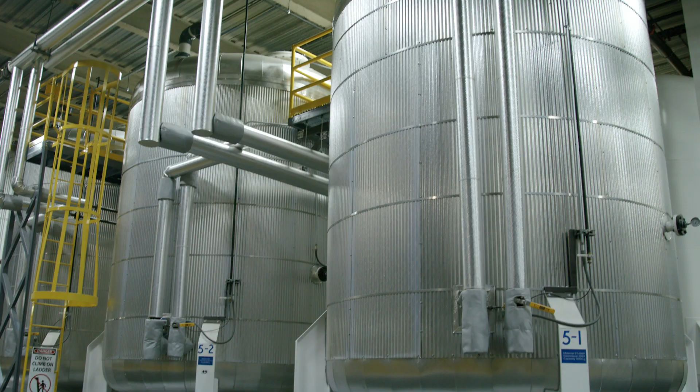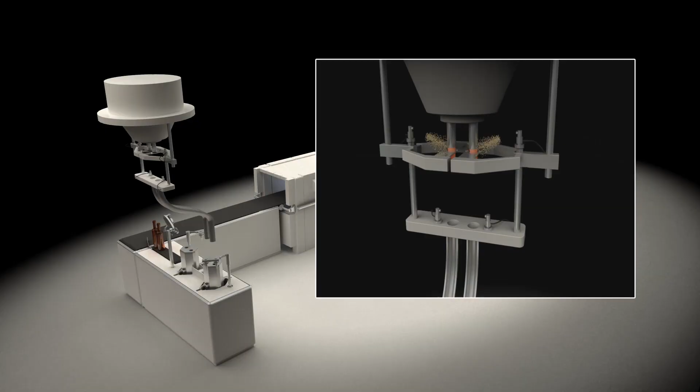Total Lubricants USA Incorporated is the supplier of clean mold hot-end lubricants and coatings to the worldwide glass container industry. We are dedicated to providing you with high-quality products, service and value. Total Lubricants offers a full range of products for all applications, including hot and cold end lubricants and coatings. Everything the glass industry needs, from the shears to the lehrs.

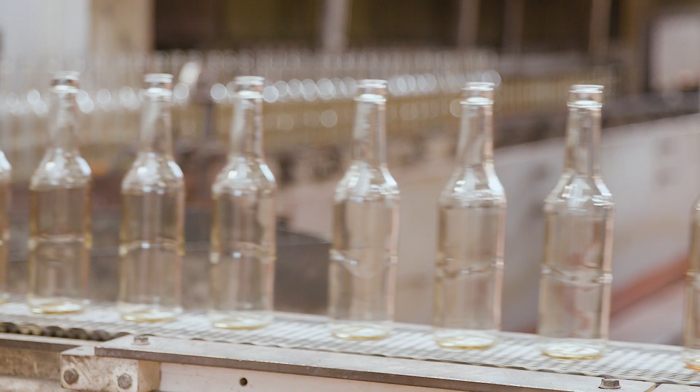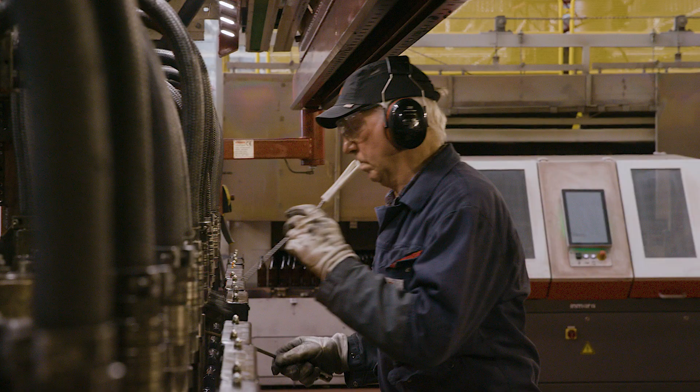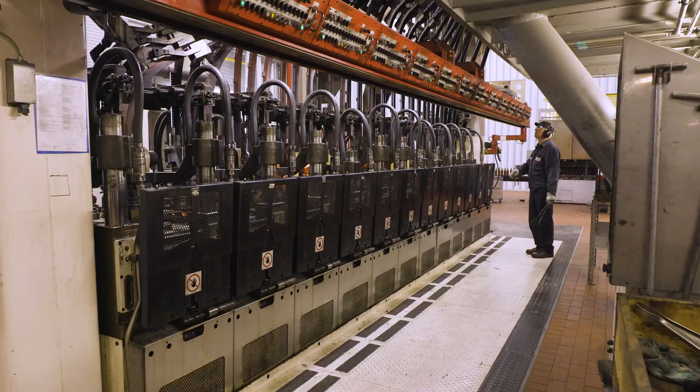In this presentation, we'll demonstrate the method we recommend to apply our clean mold swabbing compounds. These recommendations are based on our years of experience and feedback from you, our users. We'd like to remind you of certain basic fundamental rules about swabbing and safety, which we know will benefit you and your operation by significantly improving productivity and making your job easier.

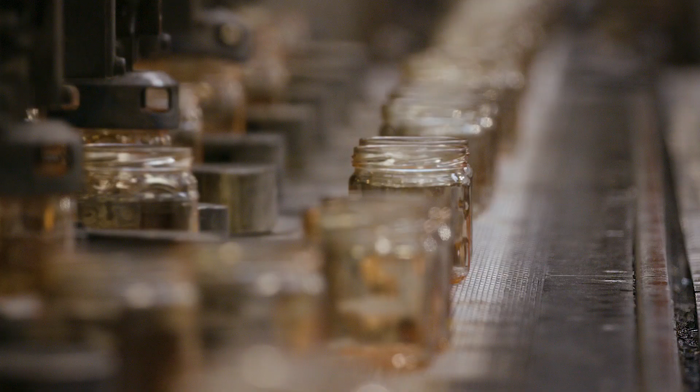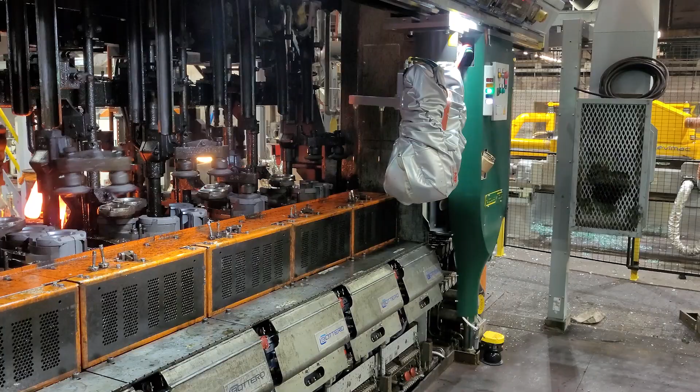Our goal is to help you get the maximum benefit, the best performance and the best value when using our products. Clean mold swabbing compounds are famous worldwide for their performance, quality and value. Glass factories benefit from these attributes by achieving the highest percent pack and production efficiency. In addition to clean mold, Total Lubricants offers a full line of coatings and lubricants for all hot-end lubrication applications, from the shears to the lehrs.

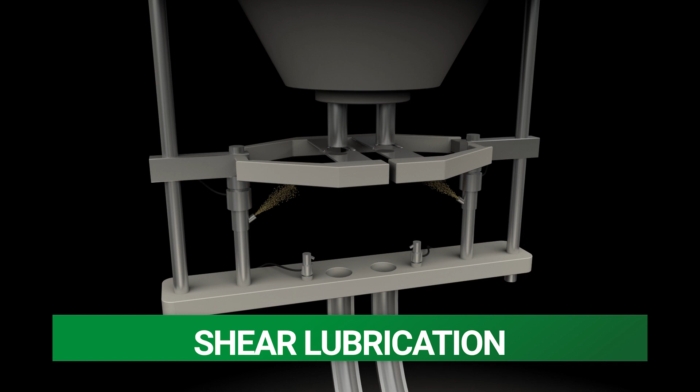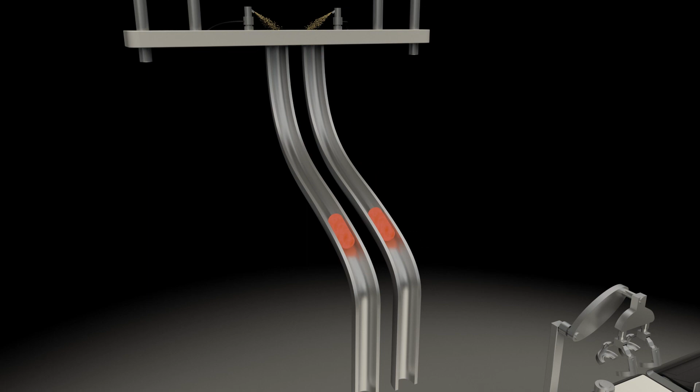Our shear lubricants work at high dilution ratios, so glass factories benefit from a very low cost per litre of emulsion. These lubricants offer excellent protection against corrosion, prolong the life of the shear blade, whilst minimising shear marks, but still offering excellent cooling and lubrication of the shear blades. Our GlassFlow product range is able to lubricate a delivery system without forming any build-up or deposits on the scoops and without leaving any marks or residue on the gob.

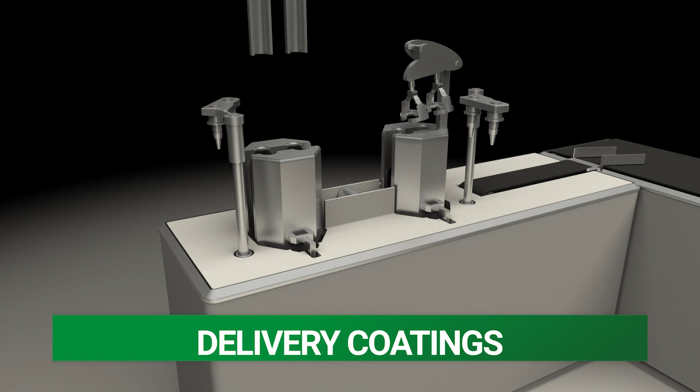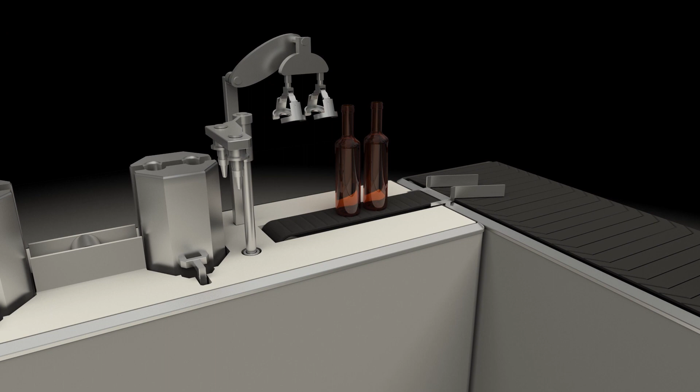In order to deliver gobs to the blank on time and on spec, we offer epoxy-based delivery coatings which are applied to the delivery equipment before being put into service. Delivery coatings are compatible with both oil and water-based products, which are used to help facilitate loading. Our products reduce the coefficient of friction between the gob and the delivery equipment, which allows delivery of the gob to the blank in a reliable, timely fashion each and every time.

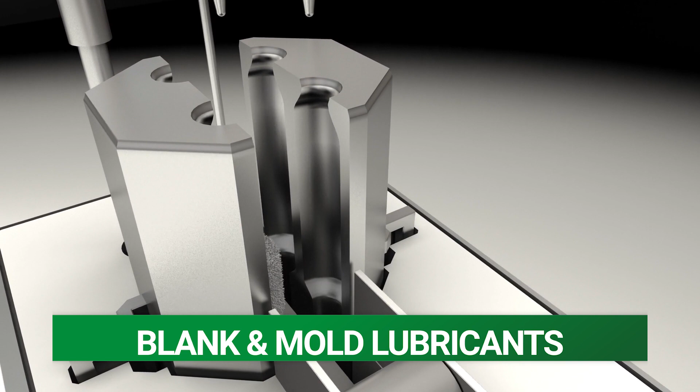Clean mold swabbing compounds are used to lubricate the blank. Clean mold products provide excellent lubrication, release and longevity of mold equipment. We have various products for different types of processes and production environments, with Clean Mold 170 and 197 still being our most popular products. Total produces special compounds to lubricate rings, molds and bottom plates. Some products are for specific applications like narrow neck press and blow, bronze molds, pharmaceutical bottles and so on.

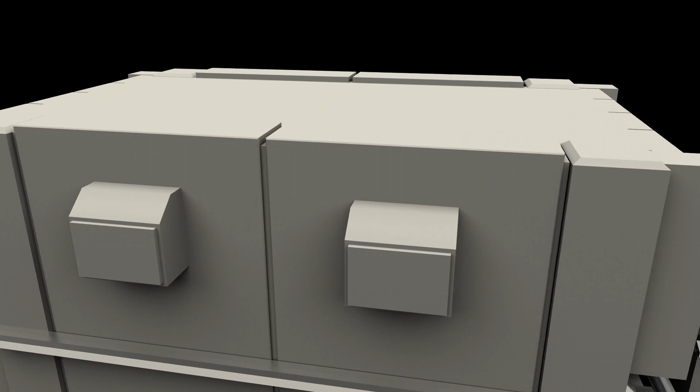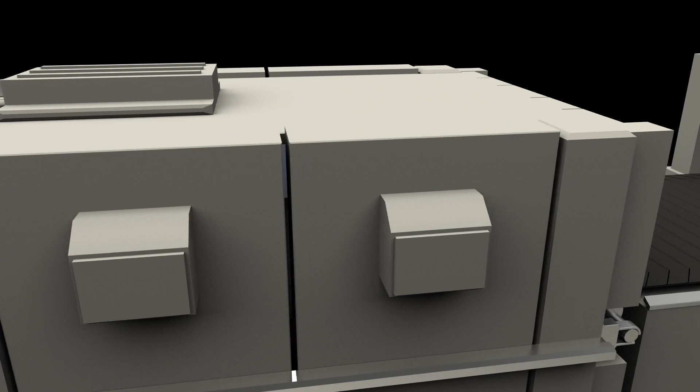Total also produces a graphite-based lubricant for use on the conveyor systems, allowing newly formed bottles to move smoothly from the machine to the leer. Compounded with an aqueous base and containing micronized graphite, it's supplied in an easy, ready-to-use form. Our cold end coatings provide excellent lubricity, scratch resistance and label adhesion.

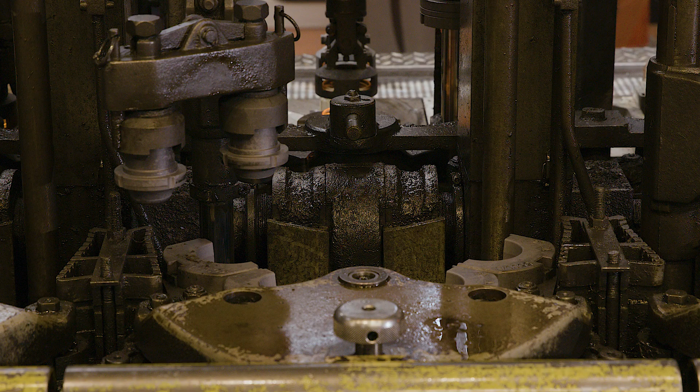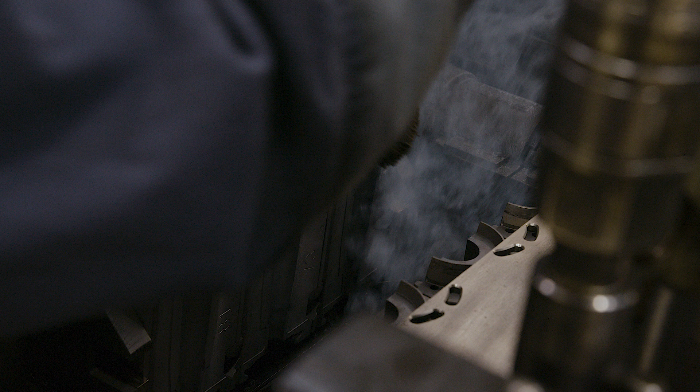So why do we have to swab? We swab to aid the forming process and to keep the machine running. If the machine's setup was perfect and could be perfectly maintained, we probably wouldn't have to swab at all. But since it isn't, we swab to keep the machine running. What does swabbing do? Swabbing provides lubrication so that the glass can move around without distortion inside the blanks, rings and molds. Swabbing also provides release so the glass doesn't stick to the metal mold equipment.

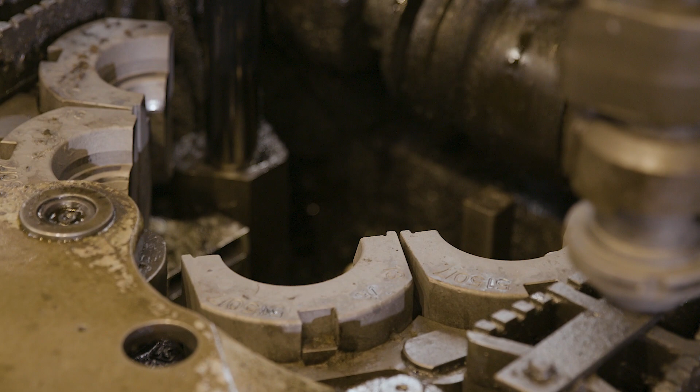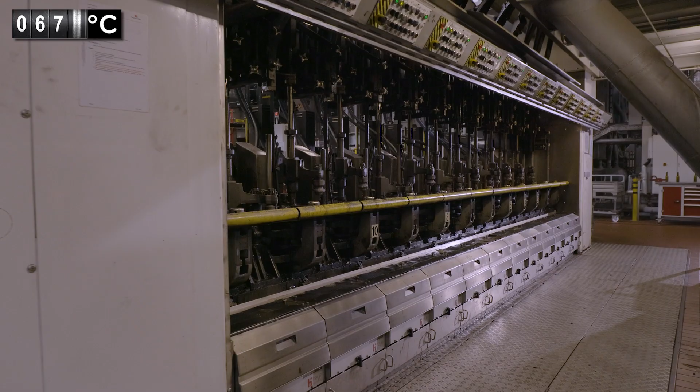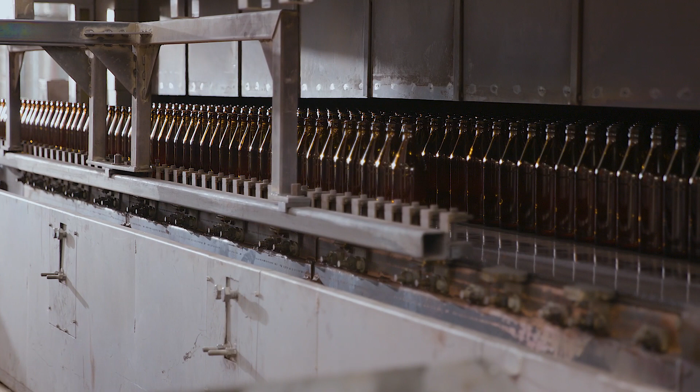Swabbing regulates the transfer of heat by providing a thermal barrier between the glass and the metal. A 1150 degrees Celsius gob of glass is transformed into a 425 degrees Celsius bottle. And finally, swabbing helps to eliminate defects. While proper swabbing will eliminate defects, on the other hand, improper swabbing can sometimes cause them. That is why swabbing correctly is so important.

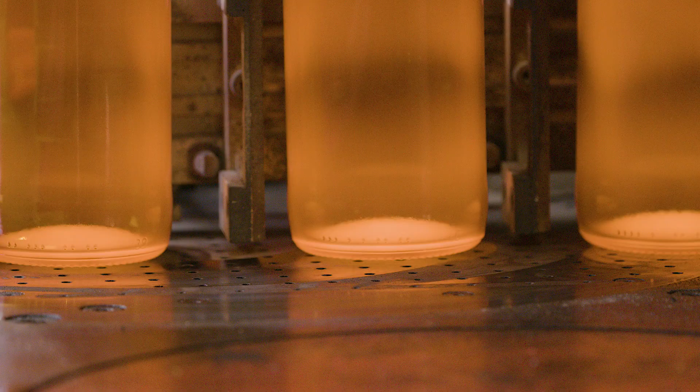Swabbing is the biggest variable in the bottle forming process because the product is applied by hand. Therefore, swabbing can have a significant positive or negative impact on productivity. The goal of this swabbing program is to demonstrate what we believe to be the best recommended swabbing application procedure. We believe our swabbing application procedures will assist you to maximize productivity and percent pack.

It will provide for the most efficient use of clean mold, and it will assist you in achieving the best possible overall results. We cannot stress enough how important it is to swab the same from shift to shift, because we believe that if you swab the same, you pack the same.

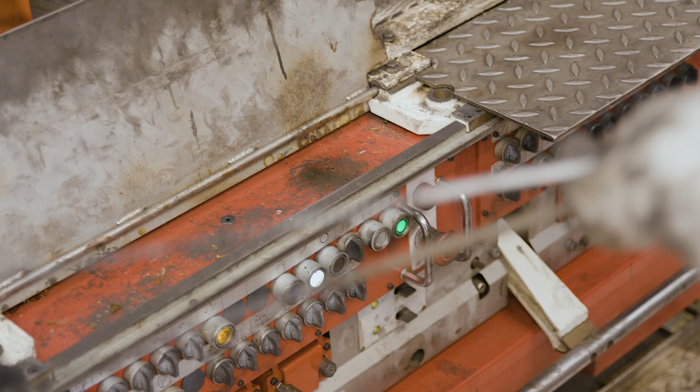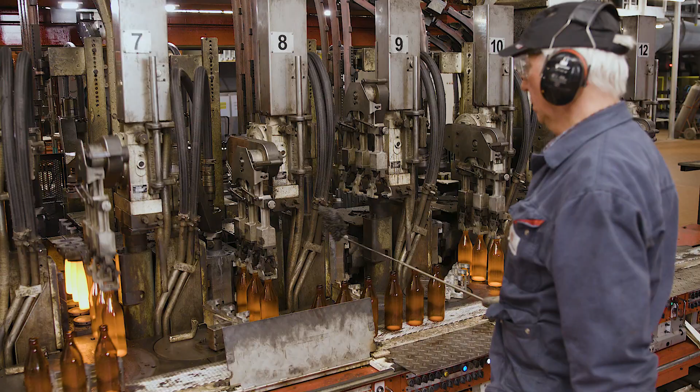We know a lot of people might be thinking, but I already know how to swab and there's nothing else I can learn about it. It's true that you all know how to swab and you can make bottles, but not everybody swabs correctly, and not everybody swabs the same way. We believe that by swabbing the right way and the same way from shift to shift, you will significantly improve productivity and make your job easier.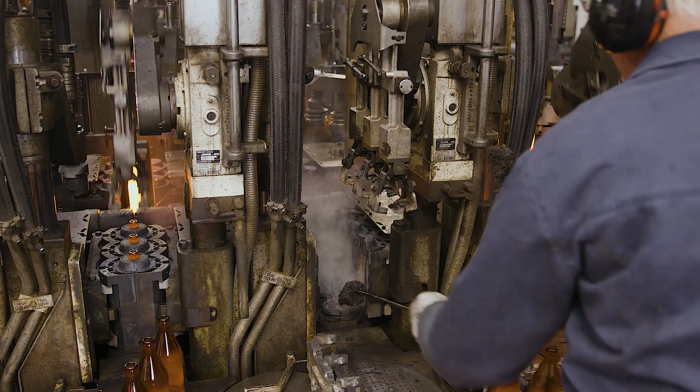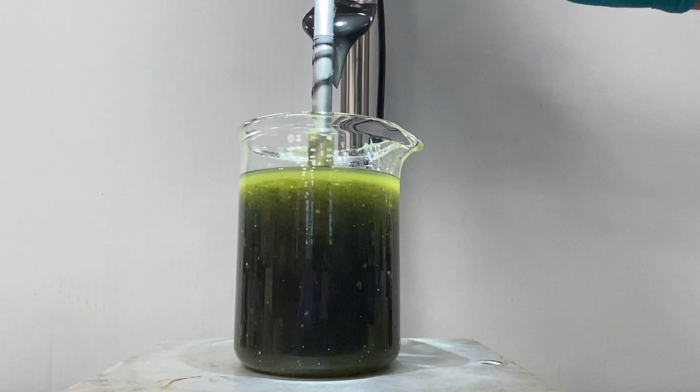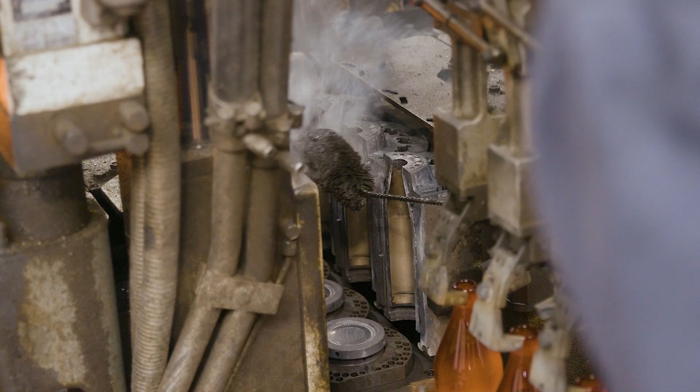What are swabbing compounds and how do they work? Swabbing compounds are made from graphite, petroleum oil, sulfur, binders, surfactants, and suspending agents. The graphite does most of the work. The graphite is the solid film lubricant that gets deposited onto the surface of the mold equipment to provide lubrication and release. The petroleum oil is just a carrier that allows you to deposit the graphite. The petroleum oil burns off and has nothing to do with lubricating.

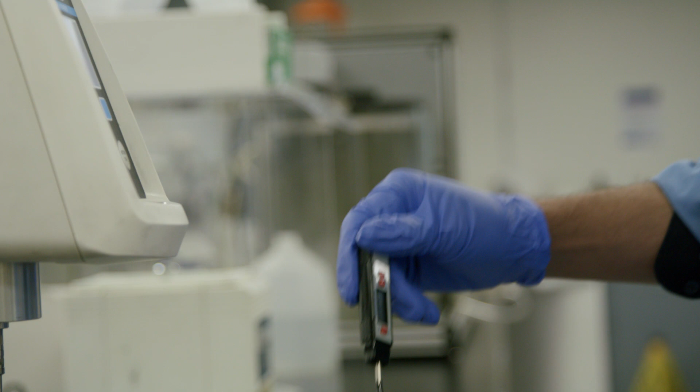The sulfur is added to help reduce checks. The binders stick the graphite to the mold. The surfactants provide wetting at high temperature because in order to have good adhesion, you need good wetting. And the suspending agents prevent the graphite from settling in the drum.

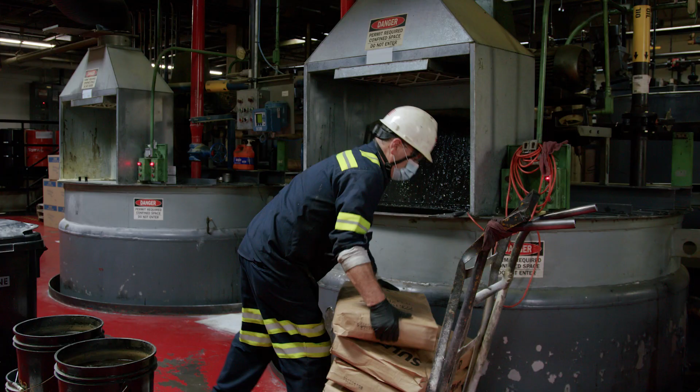In order to have consistent swabbing, you need to have a consistent product. We want you to keep the neat product cool, out of the sun, and store below 120 degrees Fahrenheit or 50 degrees Celsius for extended periods of time. Don't mix different products together, don't heat the product, and don't dilute the product. In order for you to have consistent swabbing, you need a consistent product. When putting the graphite on the mold equipment, you control where it goes and where it doesn't go.

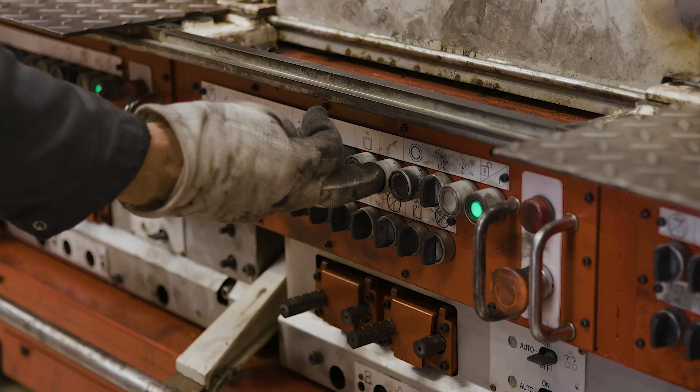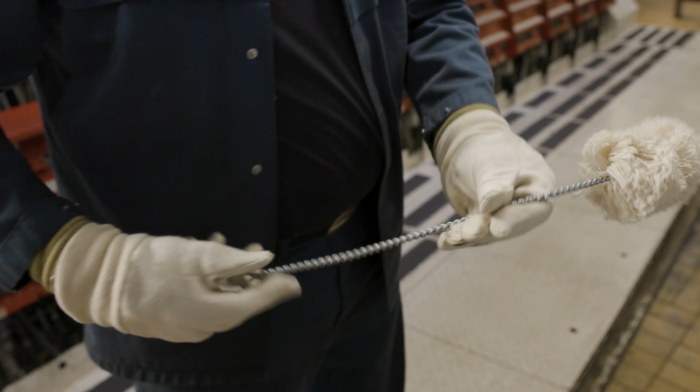Swabbing is an art, and you, the operator, know where to swab and how to swab. But having said this, there are certain basic fundamental rules about swabbing that we think can benefit everybody. Let's talk about the swab. How do you prepare the swab? You can prepare it by soaking the swab with a little light oil and working it in. Once the swab is wet with oil, the lubricant will penetrate the fibers faster.

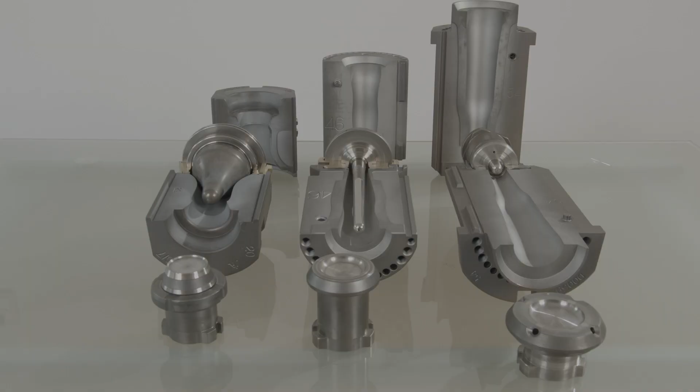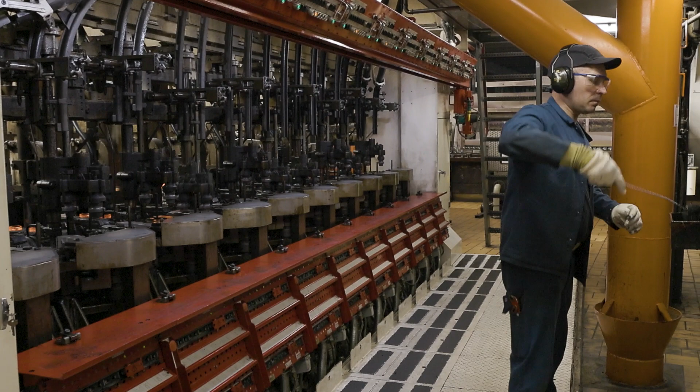Swabs should be 100% cotton, the wire tip should be carefully protected, and you should trim the swab to fit the job. We say the proper swab size should be about 1.5 times the diameter of the blank at the loading line. We recommend one swab for every 5 or 6 sections, so if you have a 10 or 12 section machine, you should use at least 2 swabs. This eliminates having to reload the swab during the swab cycle. And remember, if the clean mold is too hot to touch, it's too hot to use.

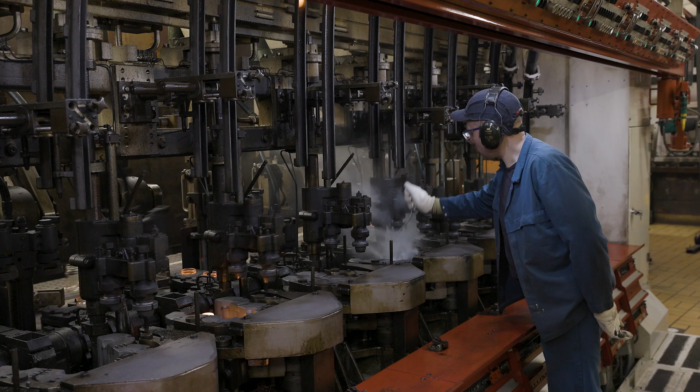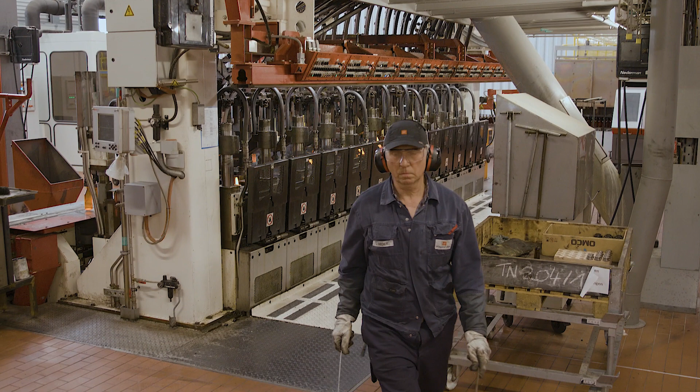A swab bucket can get really dirty. The dirt in the swab bucket gets onto the swab, transfers into the blank, and this contamination can cause bottle defects. We recommend using a swab station. It provides advantages such as a mechanism to dry the swab, a place to hang your swab, and it helps reduce waste of product. A swab station is able to hold 2 products, one for the blanks and one for the rings. The swab station has a removable tray for easy cleanup. It's important to clean the swab tray at least once a day or when needed.

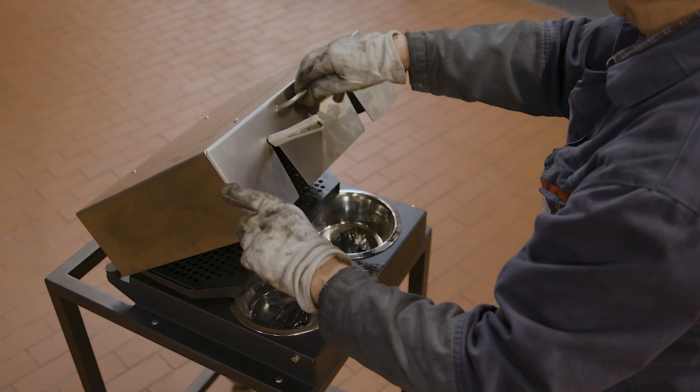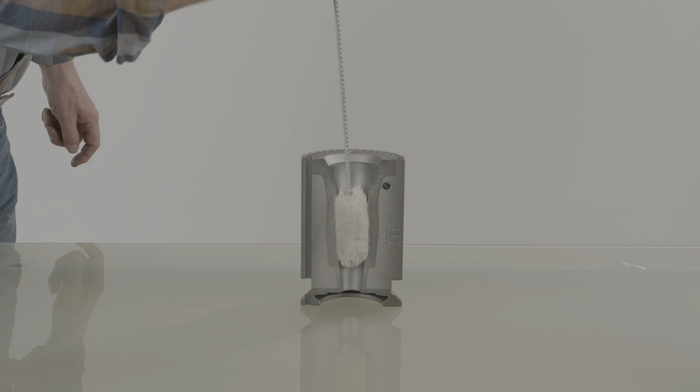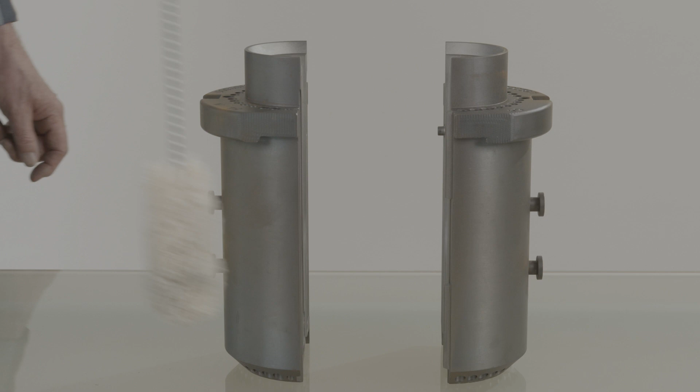Let's discuss our recommended swabbing application procedure. We recommend that you hold the swab parallel to the blank or mold cavity and that you swab in a downward direction. This is very important. A lot of people think you have to rub the mold or push against it hard. On the contrary, we recommend you swab in a downward direction using a light touch. Swab carefully and accurately. Take your time and rotate the swabbing cycle to start on a different section each time.

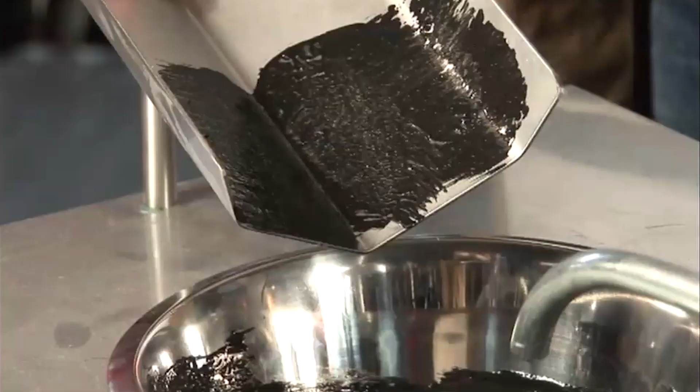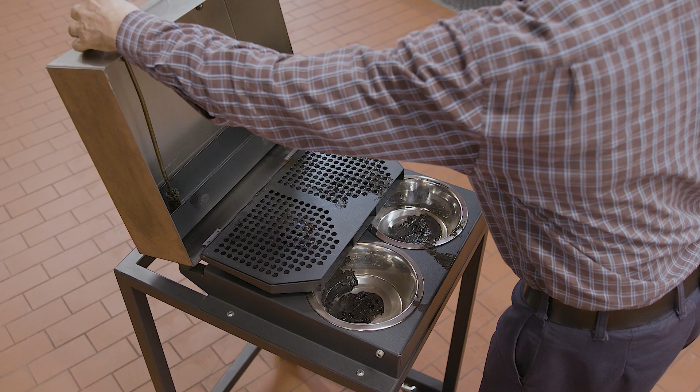This will even out the distribution of graphite over the blank and mold cavities. Load the swab after the swab cycle when the swab is warm, so that the graphite will easily penetrate into the swab. Hang the swab up when you're done, so the swabbing compound remains evenly distributed on the swab and the excess can drain off.

Each time you swab, you put a layer of graphite on the mold. In a period of 15 to 30 minutes, depending on machine speed, machine alignment and the weight of the bottle, the molten glass wears away the coating. When you swab, you apply a uniform, even layer of graphite onto the blank or mold cavity. If you use a swab that's too wet, the graphite will not stick and could cause dirty bottles, orange peel and defects. That's why we emphasize a dry swab more often is better than a wet swab less often.

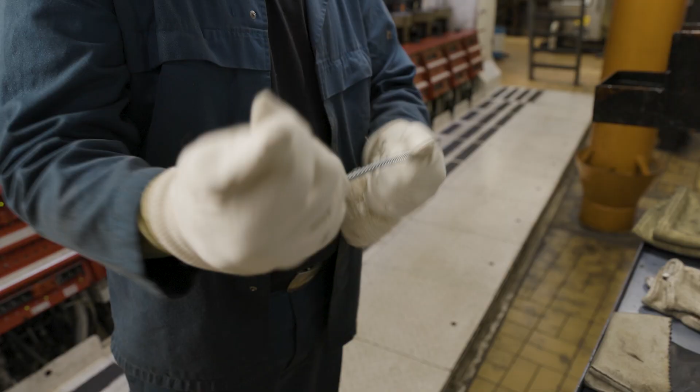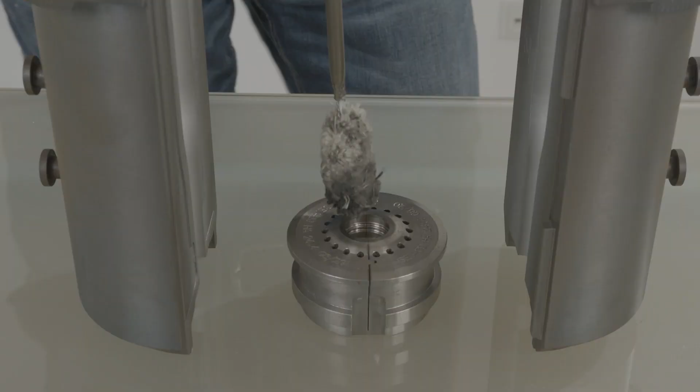Since we already talked about swabbing in general, we want to discuss in more detail how to swab the rings, blanks and molds. The rings are swabbed for both lubrication and release. We recommend bending the swab so the metal doesn't hit the rings. Be careful that you don't drag the swab across the rings. Dragging the swabs across can cause the oil and graphite to get squeezed out of the swab and run down onto the plunger. Swab the rings by touching the top surface of the ring with a dry swab and a light touch. Swab the rings before the blanks.

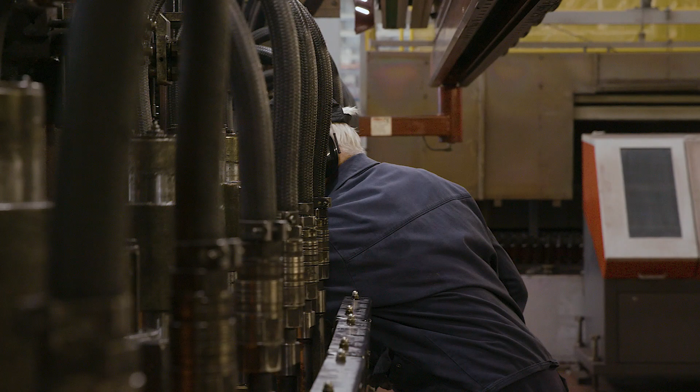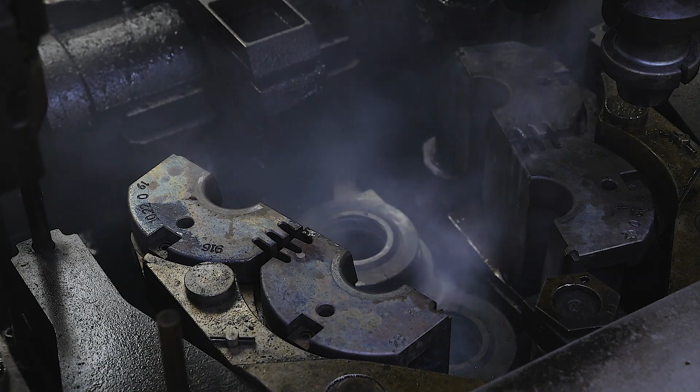When lubricant splashes up from the rings onto the blanks, it can cause hot spots that can lead to defects. Swabbing the blanks after the rings will clean off any splash from the ring dope. You swab the blanks mostly for lubrication and also for release. Swabbing the blank facilitates gob loading. The graphite coating allows the gob to easily slide down into the cavity.

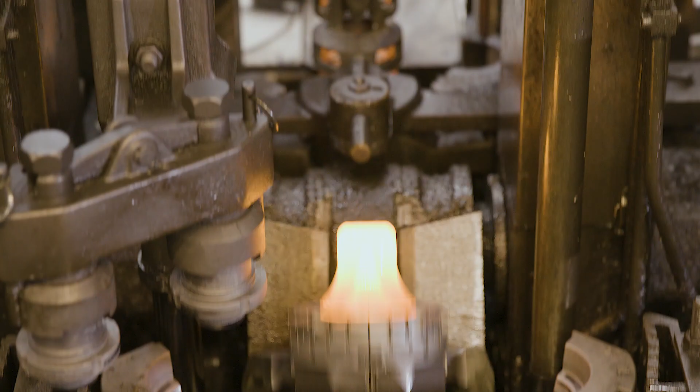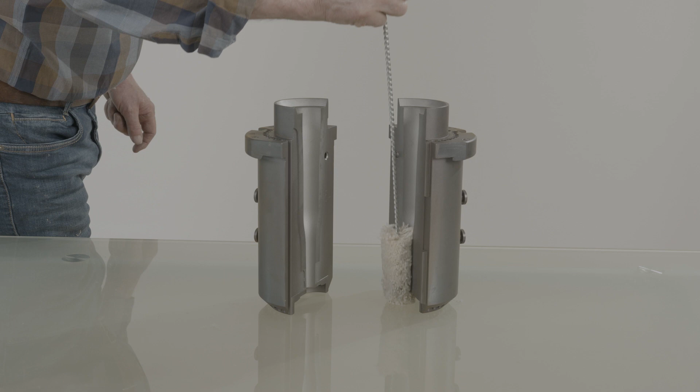In the blow and blow process, we recommend you swab from the load line down. If you swab too high, you get light bottoms and poor loading. In the press and blow process, we recommend you swab from the funnel to the restriction. For the narrow neck press and blow process, we also recommend to swab from the funnel to the restriction. If you swab too far down, it affects the run of the parison and may cause blowouts or machine jam-ups.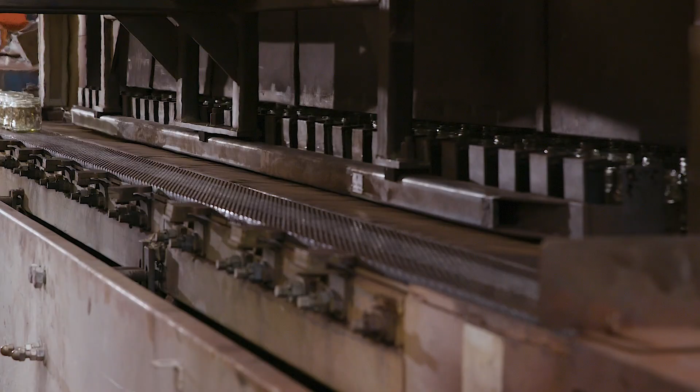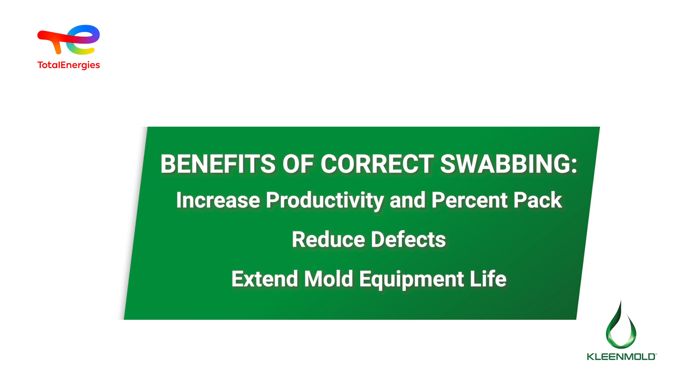And finally, you swab the molds mostly for release and a little bit for lubrication. We recommend swabbing the tops, shoulders, engravings and the bottom plates. Remember to always use a dry swab. For molds with engravings and for situations where you need very clean ware, products without graphite are available which may help your production. The benefits of correct swabbing are increased productivity and percent pack, reduced number of defects and extended life of the mold equipment. This makes your job easier.

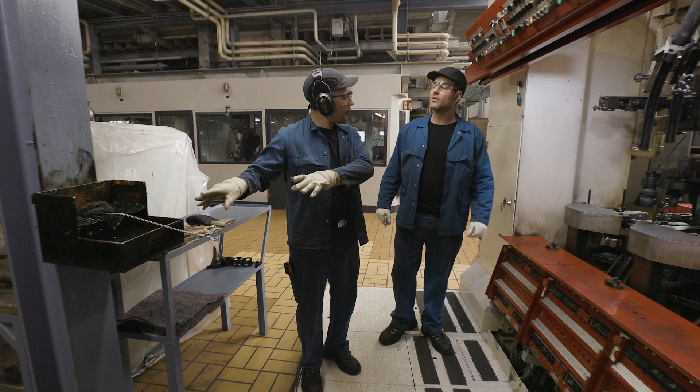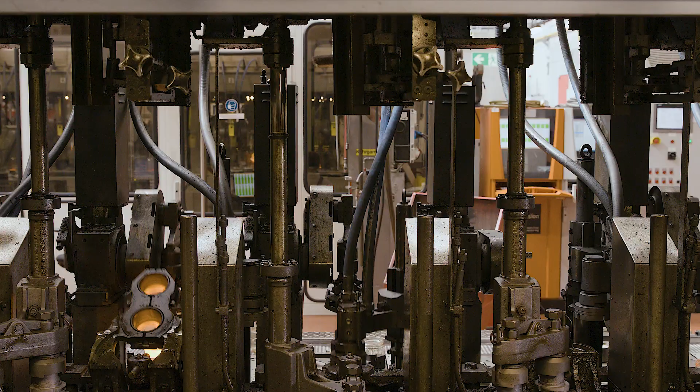Communication is very important as well. It's vital that you communicate with your replacement. The goal is to maintain swabbing consistency from shift to shift. If everybody swabs the same, you will maintain a constant blank temperature, constant loading, and uniform glass distribution. If operators swab differently, this can cause a thermal or a mechanical disruption in the blank. This could lead to increased defects and reduced percent pack. It could take a long time for the thermal and mechanical disruption in the blank to get corrected. Swab the same, pack the same.

Safety is everybody's concern. In addition to following plant safety regulations, we always recommend wearing safety glasses, earplugs and protective clothing. Don't let your mind wander. Think about what you're doing. Never turn your back on the machine. And use the safety features built into your machine.

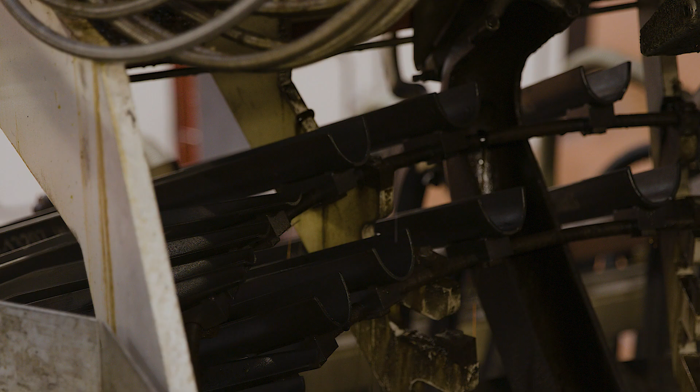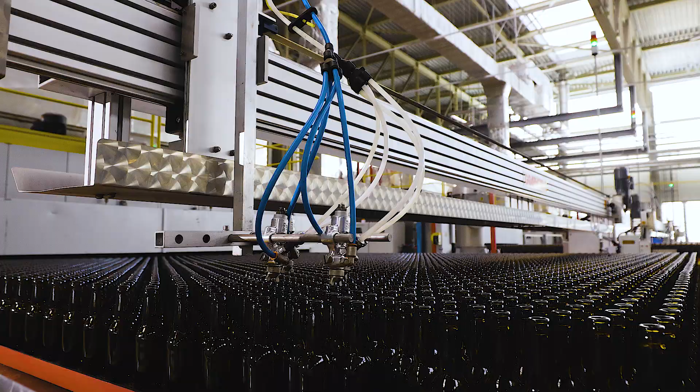In conclusion, machinery has replaced manual labor at every level except in mold lubrication. That's why Total Lubricants USA developed these swabbing application procedures. Based on ideas from operators throughout the world, it's designed to help you do the best job you can in blending science and the art of glassmaking.